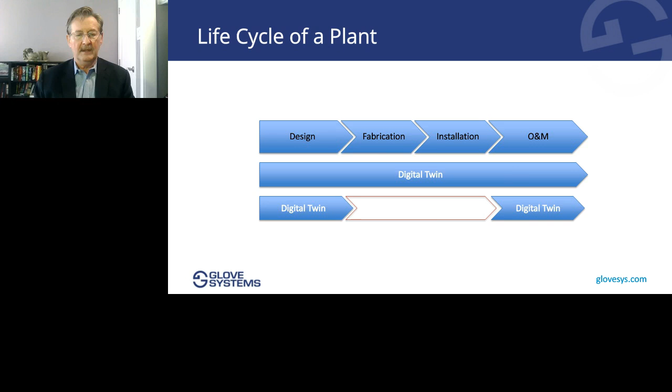So what elements are missing? Well, in the fabrication process, lots of activities go on that will be useful to capture in your digital twin for operations and maintenance. Accurate and complete measurement of as-built assemblies should be in there, along with other data, pictures, documents, and certificates that can all be associated with your digital twin at this step of the fabrication process.

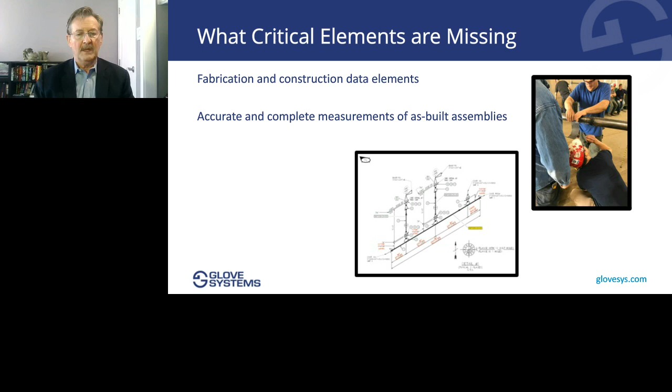Why isn't fabrication a part of a digital twin right now? If you look at the picture on the right, you'll see people measuring a feeder tube for a nuclear reactor. The tools they're using haven't changed much since we built the pyramids - the tape measure is made of plastic now, but it's a tape measure. There's a square, a level, and probably a plumb bob. Those tools have been used in the industry for years.

People are used to them, but the problem is they don't transfer to anything digital. And the other problem, of course, is they're not really repeatable accurately.

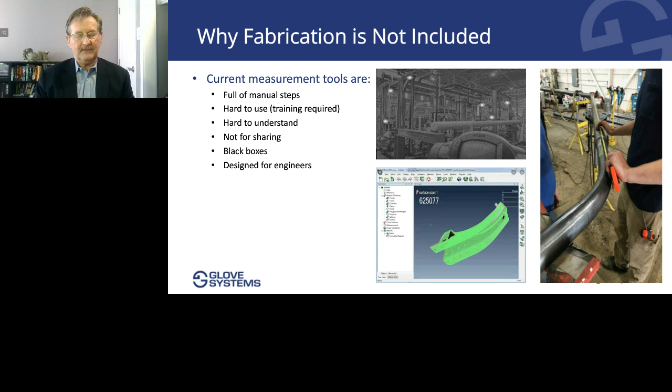Of course, there are digital tools to measure things like this. If you look at the picture in the center, the gray picture with white spots, that's showing a laser tracker setup, which can measure to a high degree of accuracy and give that back to you in digital form. However, the problem with those tools is that they're hard to use and time consuming, and there's no easy way to bring that data back to your digital twin. These are great tools, but designed for engineers, not for craft workers in your fab shop.

We'd argue that if you're a fabricator, you should want to be using a digital twin in your fabrication processes. We've shown that if you have a 3D model you can share with your craft workers, you'll improve quality, lower costs, reduce mistakes, and generally improve your processes in fabrication. Nowadays, with a shortage of skilled people, good tools are also valuable in attracting people to come work in your industry.

If you're a plant owner, you should want your fabricator to be using a digital twin, because if they do, you'll get a lower cost, higher value product. And if all your fabricators are doing this properly, you'll have less rework on your job site, things will fit together faster, and you'll have a tool you can use for training your own operations and maintenance staff.

We conducted a study to prove this, in which we took 40 engineers in training and 21 experienced pipe fitters, broke them up into two groups, and had them go through a process of building a pipe assembly - a pipe spool - the old way and the new way.

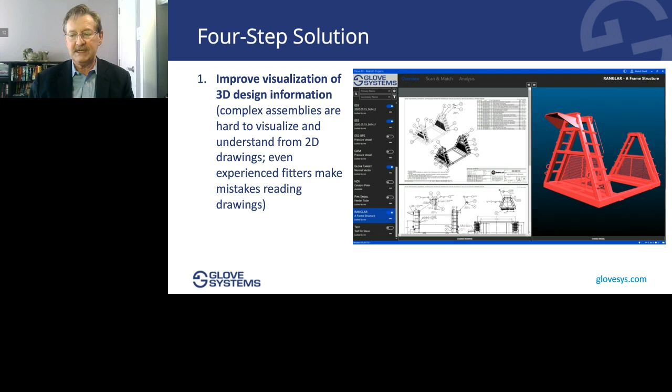All right, now we're going to talk about what Glove Systems does and how it can help in building a useful digital twin. We take a four-step approach, and the first thing we do is bring into our software not only the cut sheets, but the 3D model or the digital twin. We find that by doing this and making this easily available to the craft workers on the plant floor through generally touchscreen computers, that people can now look at that 3D model, rotate it, measure stuff on it, and much more quickly understand what they're trying to build.

The second step is to collect the 3D as-built data, and we do that using a variety of sophisticated 3D laser scanners. We set up on the floor and we shoot pictures of that, and we bring that into our software. So after you've loaded the digital twin or the 3D model, and you've loaded using the software the point cloud of the as-built assembly, we will compare and measure. Nicole, let's see the video.

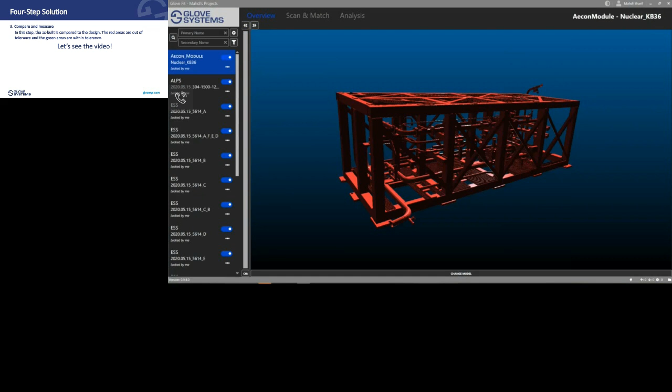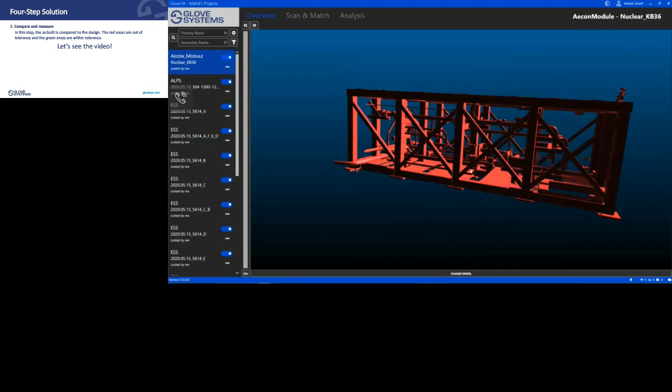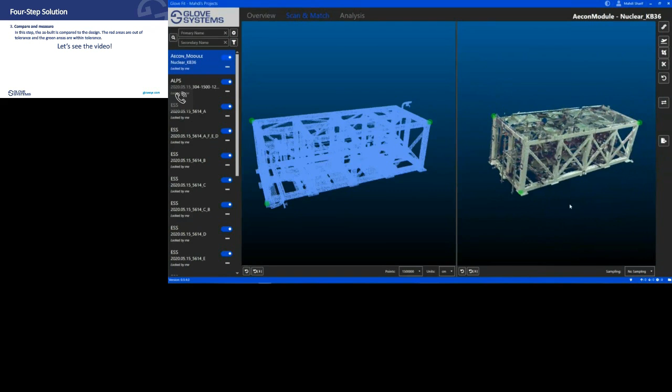In this session, we will be investigating the utility of Glove Systems platform for inspection of large and complicated modules. In this page, as you can see, we have a 3D model of a nuclear module that was about to be built. You can see this is a complicated and large module. One end is 15 meters and the other face is about 7 meters. Within the module, there are many pipes with different orientations and angles, and also pumps and valves. Glove Systems was asked to come in and laser scan the module after it was built to point out any deviations or, because of the complexity of the assembly, any items that might have been forgotten to be installed or was in the process of installing. On the right, you can see the 3D scan point cloud of the module after it was acquired. You could see the pump, you could see the pipes, and the structure. On the left, you can see the 3D point cloud of the model. This is how we expect the assembly to be. On this page, we have selected 3 corresponding points between the scan and the model to overlay the two on top of each other to see any possible deviations. Let's go onto the analysis page and look at the results.

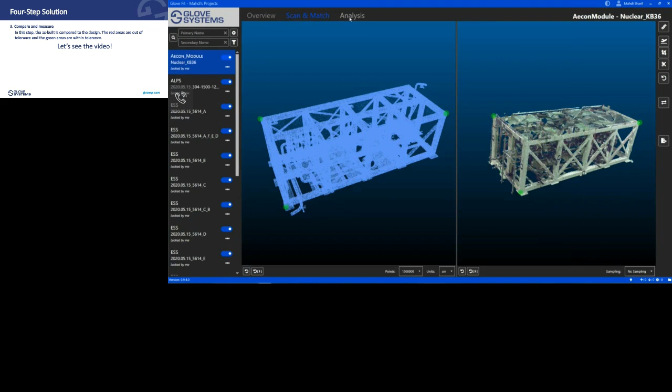After coming to the analysis page, this is the first feedback that we will see. We would see the model overlaid on the point cloud. The overlay itself, before generating the heat map, could provide some valuable information.

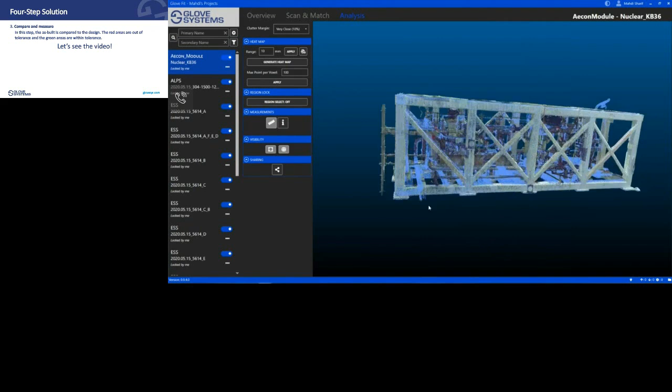For example, I could see that this pipe on the bottom here has not been yet installed. I could also see that I have a significant deviation for this pipe along this run over here.

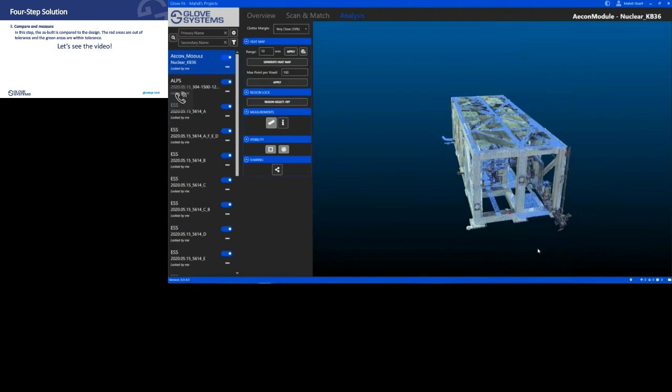A couple of the things that we could see is some of the items like the fences at the bottom have not yet been installed. However, they were deemed that they were not critical. We could see that this pump, that is an extension here, does not exist in the model, so we were able to follow up on that with the fabricator.

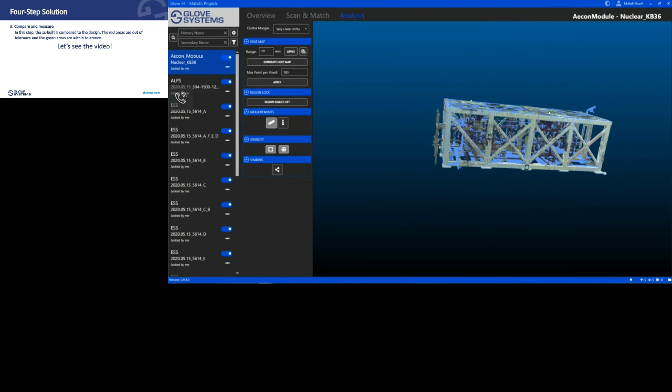We could also see that this ladder is not part of the model and should be detached, and the only reason that it's installed is to allow the fabricator to build the second level of this module. Let's generate the heat map and see what kind of feedback we would get.

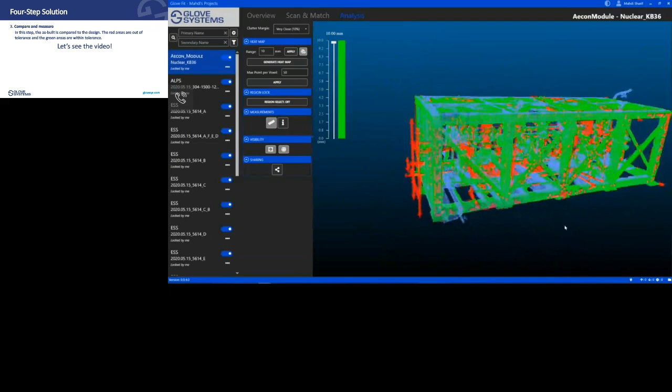So here's the heat map of the overlay. As you can see, the heat map can quickly identify the fact that we have a significant deviation here. We could also very quickly identify that this pipe has not yet been installed, and we could see that this ladder and the attachments of it are all not part of the model and need to be removed.

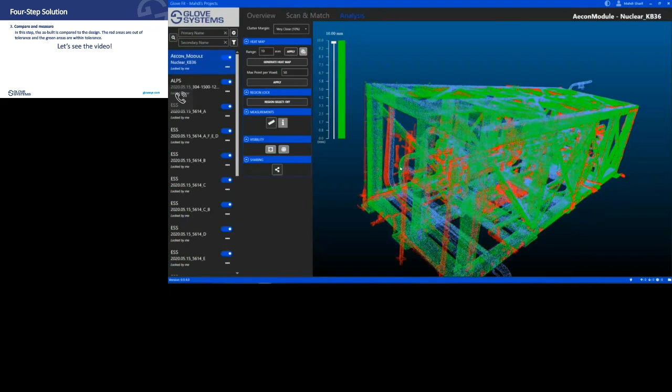With the heat map and the link, you could also see how far off you are on the pipe. So let's use this feature and see how it performs. If I click here, I could see that I'm off by about 6 centimeters.

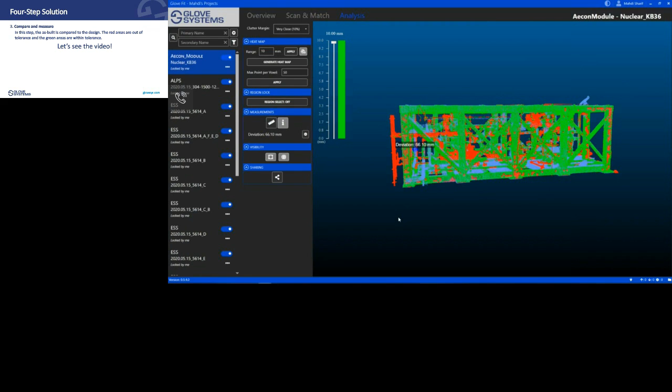The total time for this inspection was less than 3 hours, which is significantly faster than the alternative approaches. In addition to fast inspection time, providing the 3D data resulted in quick identification of errors and saved time in communicating these errors across different stakeholders.

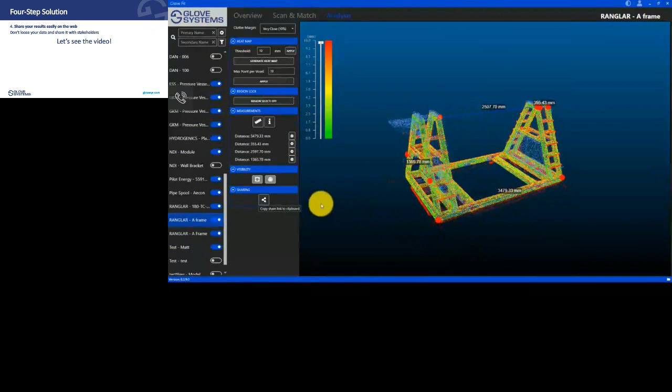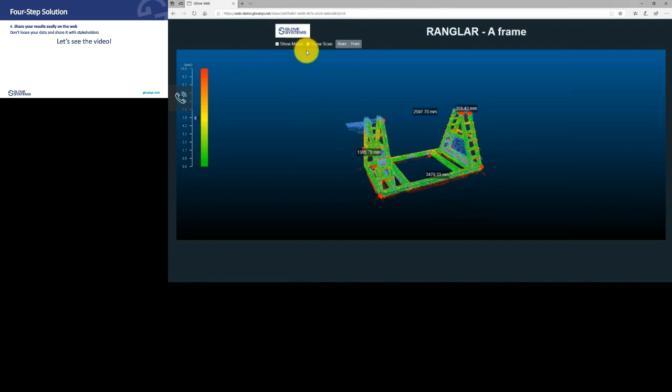So what we're seeing here is what you would see if you were the project owner and your fabricator had shipped you this different module. This is an assembly for an offshore platform, and shipped it to you so that you could look at it. And what's happening here is the owner or project manager is examining the assembly to compare and determine if things are up to spec.

And I will say that when we started this business, the idea of sharing this stuff on the cloud was viewed primarily as a cost saving, avoiding the expense of sending people to travel. That advantage has now become huge as COVID has established that people just don't want to travel anymore.

So in conclusion, Glove Systems envisions a future where project people, construction people, and operations people are using fabrication data to improve the entire process, not only of building facilities, but of adding value to the digital twin for continued use in plant and operations.

And we do this by adding better tools to the fabrication process and making all the data available in the cloud. One of the huge benefits to this, of course, is now you don't have to travel to the job site to determine if the assemblies that you're having built are dimensionally accurate.